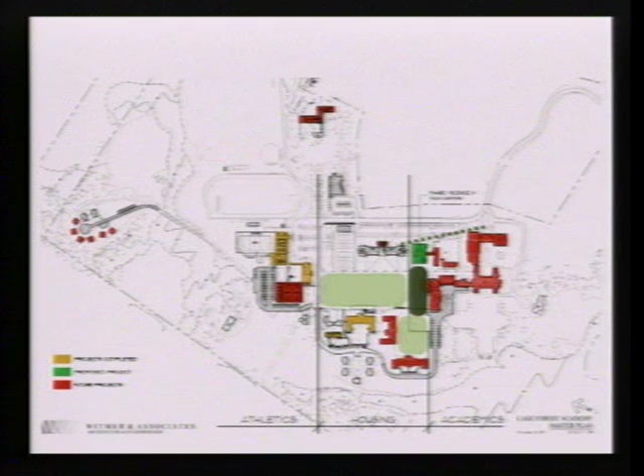And we really have four sides to this: the student union or cafeteria building here, our science building being here. So we have this active space, which is this field. And then we'd also like to set up this secondary park space, student area, which would be more passive, meaning a place to hang out, sit down under trees. So we want to start to create that space with our new building too.

In color codes, this is red, so these are existing buildings that will be future projects. Also, there's an existing dorm to the west here, and these are some new dorms proposed for long-term planning.

Circulation: these areas just show sort of main corridors of circulation. Actually, east-west is more pedestrian, this being the biggest one that comes into the front door of the old Reid Hall, and these are secondary pedestrian patterns that go through the campus. We wanted to maintain and really enhance that.

And north-south is core, the main one being down through the center of the campus, which is mainly pedestrian access, also vehicular, and then vehicular access as you come around the secondary one on the other side of the green.

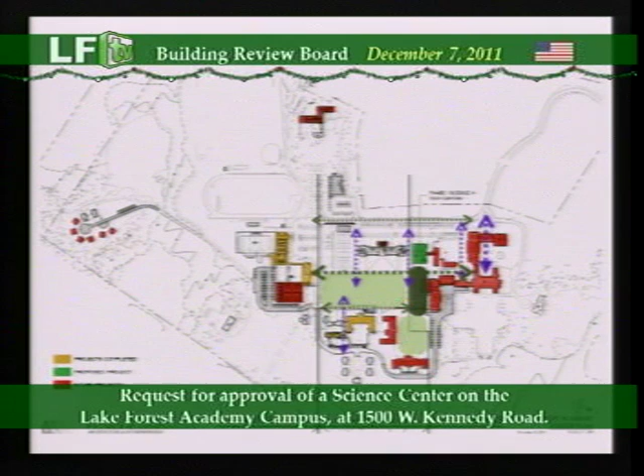So that really, as the site unfolds, this is just a little close-up of that. This is the existing Performing Arts Center. Here's our new building, and we really wanted to think about all the space around the building.

These yellow arrows really are the student access to our building. So two outside ones, which are this one to the west, along underneath the loggia on the existing building coming through this space, and then the one on the east, and then an interior link that would link into the Performing Arts Center.

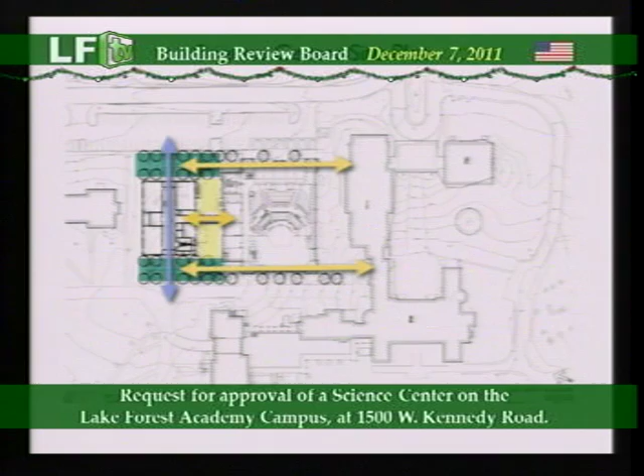Secondary access being very important, that there's a way through the building, both visually and physically, to get from the parking lot into the campus this way, that you can see through the building, through the center spine. Our landscape plan then sort of follows that idea and enhances that we have these park spaces.

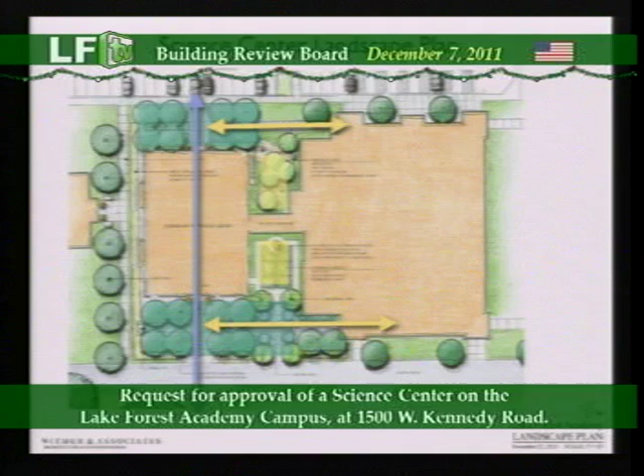Let me just show the arrows here. These are the circulation patterns through the landscape plan. And then we have these park spaces for sitting and student activity, really lounging outside space in the front of the building, and then more importantly in the south or west of the building, which is really on this main axis through the campus.

And then we've created these exterior courtyard spaces really for scientific experiments that they have within the school, that they can develop in these courtyard spaces between the two buildings.

There's also an alley along the north side of the building which allows students and faculty to transpose into the buffer there. They've got sort of an alley of trees that go along this, and these pick up the secondary alley that starts to run down the side of the green.

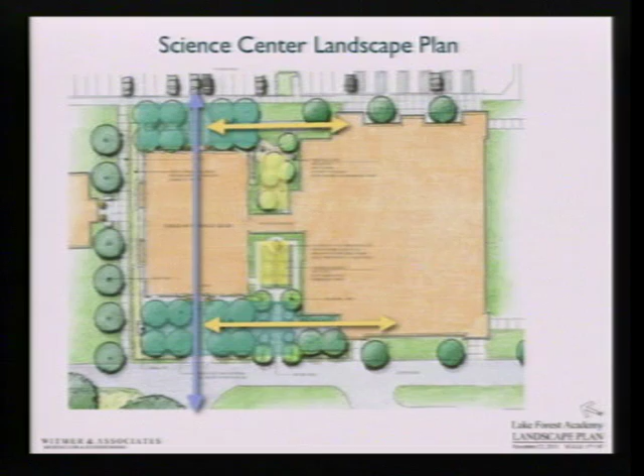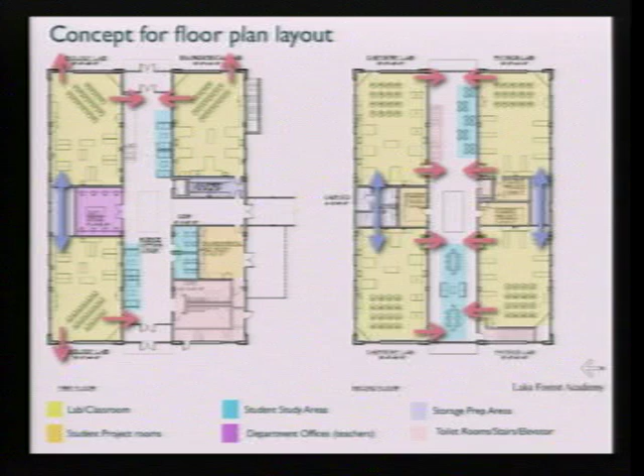The building itself is pretty simple, and what we try to do is do things somewhat in a scientific manner. We needed 8 labs, or 7 labs, and really we have one corner here which is toilets and some support space, and then it's got lab rooms in every corner, and they're such a large size, about a third bigger than what the existing spaces are now, that they need 2 ways out, so that sets up some circulation.

And so we have this center corridor space that really is open in pure glass on either side. It's not only a way to transpose and get into the classrooms, but it has learning spaces and spaces that kids can study out into, some lounge areas in the center of the building.

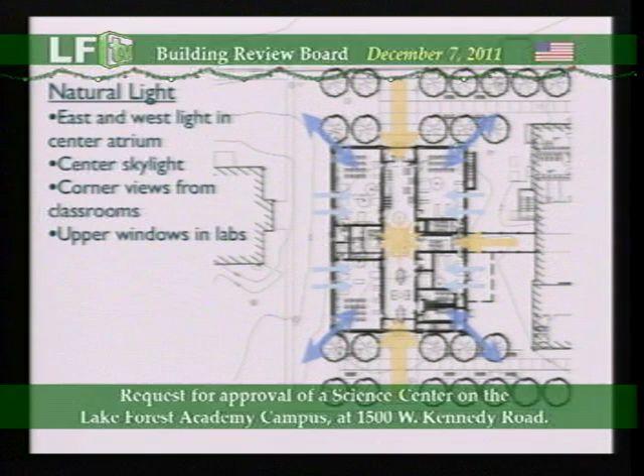Natural light's really important. We have 3 different ways of getting light into the building. One is the biggest way, the glass in the center atrium, which has glass on either end, plus a big skylight in the center, and light that comes in from the link. Then the classrooms have large windows in the corners, which are part of the learning spaces in terms of the lecture area.

We need some flat wall for projections and for board space. In the back of the rooms, there are smaller windows above the lab counters, which allow natural light to get into the back of the building, or the back of the classrooms. So there are 2 different ways that it gets in.

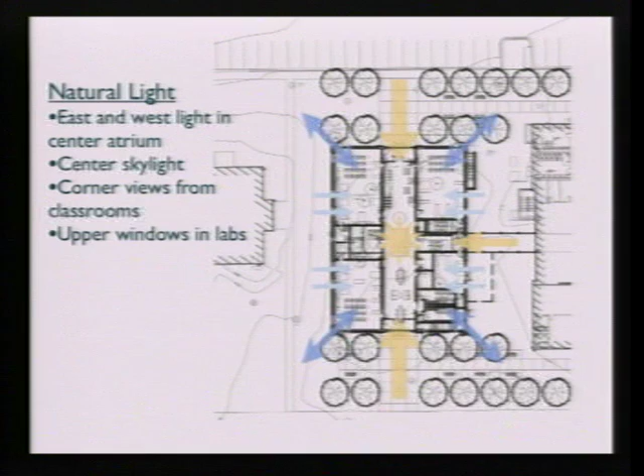The structural system is somewhat interesting because we looked at a number of different ways of doing it. What we're proposing is a precast insulated panel on the exterior, which will be a bearing wall, and then a poured concrete column and slab system that comes in. So we're going to stand up the walls, all 2 stories of them, and then come back in and pour the floors.

It's important that the interior, the structure itself, will be the visual on the inside, so you'll see not only the concrete columns, but the drop panels where it picks up the shear of the load of the column coming through. When you teach kids through these things, you can see the structural piece of it, which we feel is important. The insulated exterior panels are interesting in terms of how they're made, the insulation value, and the finishes on the inside and outside. There's a lot of interesting aspects that we feel are appropriate for a science building.

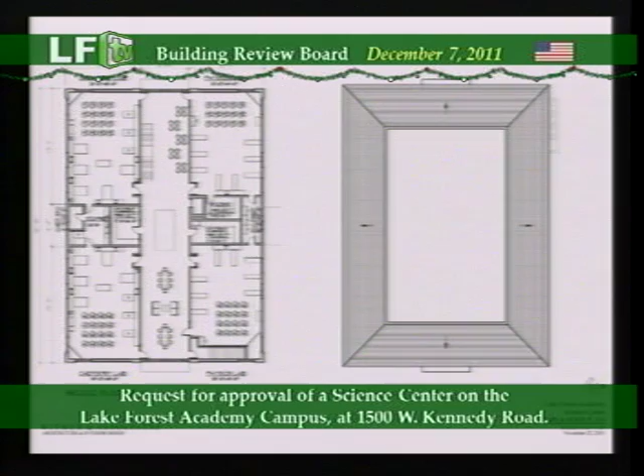Here's just the clean floor plans. The roof plan is a big bathtub, hides our equipment. I didn't show the skylight in the center, the big skylight in the center there.

Our visuals of what we really looked at in terms of science buildings, I think the Apple Store is a good one. I think it's an iconic thing, and I think this idea of sort of clear glass middle stems from that. Just some other schools that have done science buildings in the past that we were looking at, a lot of natural light. And then the existing context that we're putting this building in.

The existing manor house that's there, we've studied it for a long time. It's funny, I've looked at it for probably, I want to say like 18 or 20 years ago. I was with another firm, and we were looking at doing a building, the first spot right here, a library, and we actually looked at it being a modern building. So there's a lot of qualities they looked at, and then over the years, just understanding the features of that building, how it's put together.

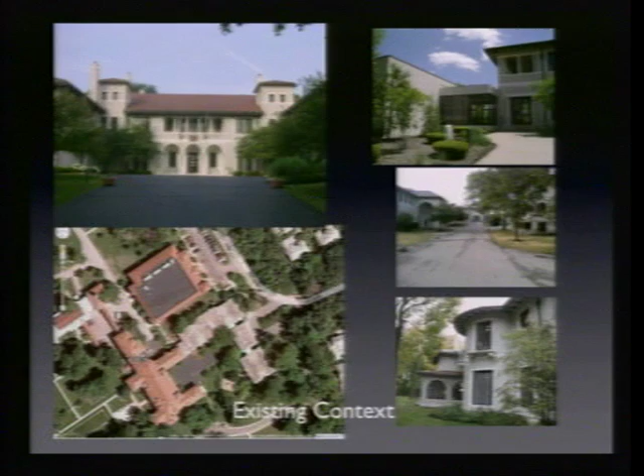Basically what it boils down to is it's a roof of tile, and then 2 materials that have trim and wall. So we've responded in different ways, and we want to think about that building in a similar way. The other is the existing Walter Netsch building, the concrete, and how when he designed that building, how he responded to the existing structure in its ideas. I think when we went through the structural framing of this, how these things are put together, it had some influence on how we did this new building and thinking about it.

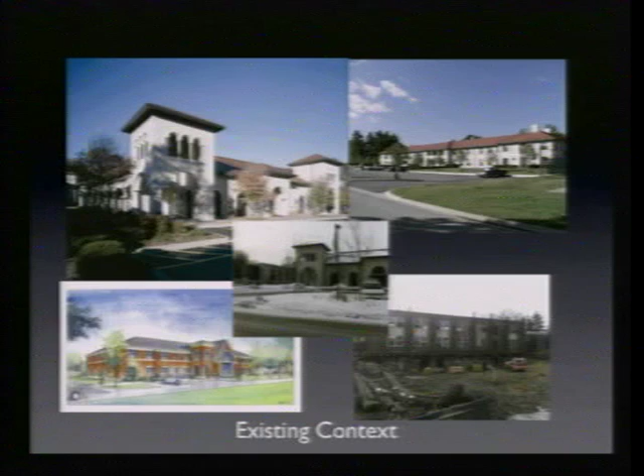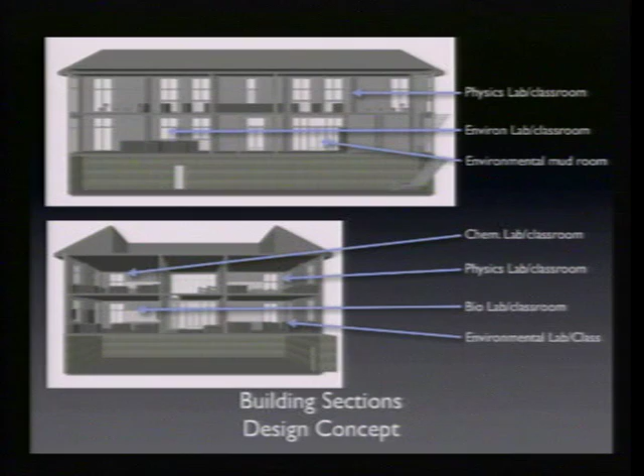And I would say lastly is all the projects that we've done in the past, over the years, the Performing Arts Center, the dormitory, the building that we moved, and all the little details that we've come up with for all those different pieces. These are just some sections which show kind of how the windows work at the corners. These are floor-to-ceiling windows, and the windows in the lab space, this bathtub piece, this center atrium area, it's all glass.

Some design concepts that are important to us. One is these exterior gathering spaces that we talked about. We also feel it's very important that the building height really relate to the Performing Arts Center, so that when you come in across here in the front and the back, these eaves line up. And we're fortunate that our floor-to-floor heights really work with a science lab, because if it's too short, it doesn't really work. So we feel like that's important to have that continuity.

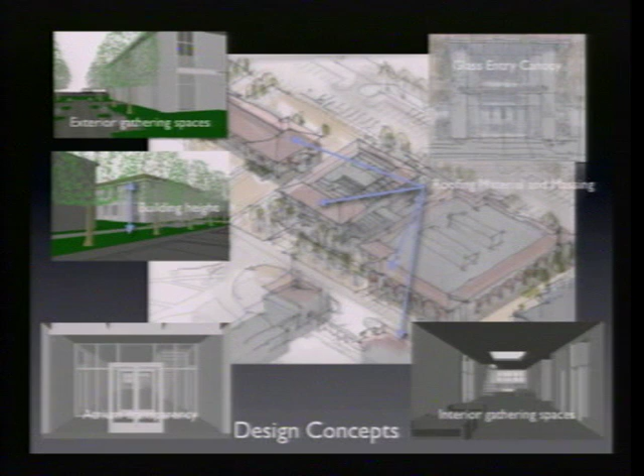The roof shapes, I think it's really important that we use Ludowici clay tile, which is on the original building, and that we used on all the other buildings, that's a continuum along this edge, so that this building really fits in.

Transparency through the center of the building. We're going to design this with LEED in mind, so we're going to submit it for a LEED certified building. We'll use a bunch of techniques which make sense, not only for any building that we do, but especially for a science building and the teaching opportunities that we have with those ideas.

These are some renderings which show the exterior. This center glazed area is going to be smoother. It's going to be butt glazed panels that come together without any mullions or caps on the outside. The corner windows will have aluminum mullion caps, so that you really read this as smooth glass. There's a glass canopy that sticks out about 6 feet, which will have glass panels above the top, and you'll really be able to look through that space.

Here too, you can see the pilasters at the corners and the two colors, the light color and the dark color, which relate back to the original structure and actually all the buildings that we've done over time at the academy. This is just a corner looking at the northeast.

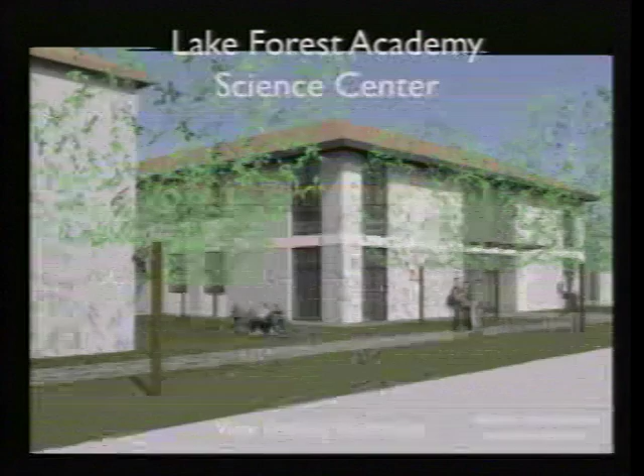This is the existing performing arts building, these roofs lining up with the clay tile roofs, you can see the canopy entry here. I'm sorry, I had that flipped, I was looking at the west and the east. They're almost identical with the exception of one door location.

The other thing that's really important is that from the parking lot or from the green in the back, you can see into this building. You can see the science pieces of it, the classrooms, you can see what's happening, that it is a science building just from the function of the inside, through the transparency of it.

This is from the courtyard, or the green in the center, so you'll see the classroom space, the lab hoods, and all the things in the back piece here. This is that green park space. These are just sort of diagrammatic in terms of trees and showing scale.

To the space, I think the landscape plan has a little better detail on the particulars. There's more ground cover and more lower plantings along the building. It's kind of a combination of all those.

I'm almost done. I have a sample here of the precast, and then I took these slides.

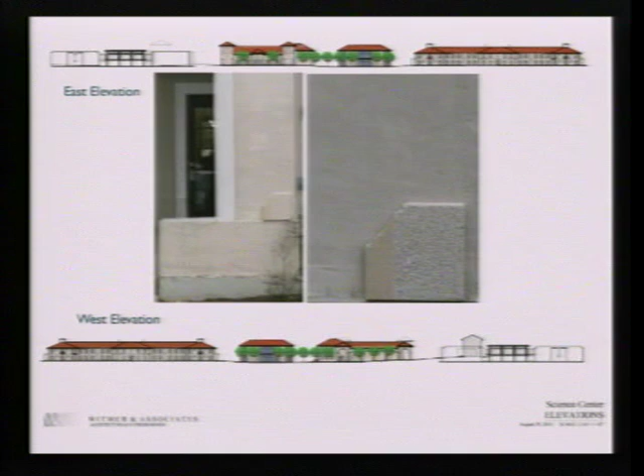Basically what I wanted to do was, this is the original theater building, and that's a little square here. What I want is, from the parking lot, that this looks like the same, like you can't tell, it looks like stucco. But when you get up close, you can actually see what the composite is, the aggregate, the cement, how that's put together. So it's different than stucco. Again, just like a scientific idea, you can see what the materials are made up of to make that concrete piece.

And I have a sample. They've done a pretty good job. This is the first one that we've taken out. I'm really happy with this piece. This is the trim piece. What you can see here is this piece.

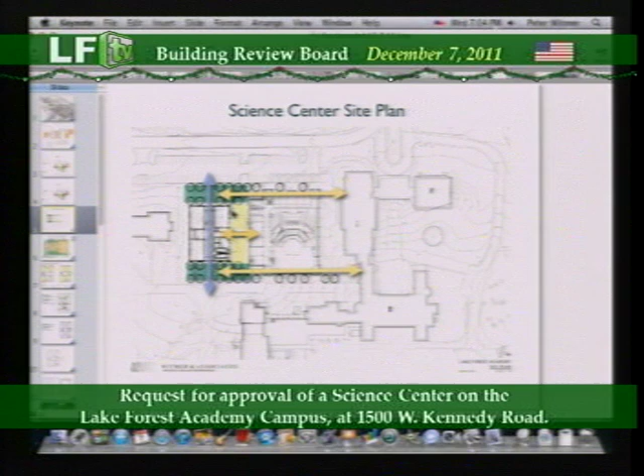So the roof over that connecting link, that's the same height and width as the banding that goes across the front of the building? Right. And that'll be concrete? That'd be a concrete roof, right? Mm-hmm, that'd be poured concrete.

Okay, I wasn't clear between the renderings and the elevations on the windows. Is it the intent for the corner windows to go to the floor? Yes. And then the ones in the interior, there's a concrete panel? It's designed to look like an insert panel, but it's actually part of the precast. It's the trim color.

That concrete panel is at the millwork where the countertops are for the labs in the back. In the lower windows that go to the floor, we have an operable piece at the bottom, an awning, so you get natural ventilation through those spaces. The idea is to get as much glass into the classrooms so you can see out as much as possible.

In the floor plans, it looks like you have those flat panels or whiteboards in each of the corners. Are those in front of those windows, or how does that work? I think the best way would be to look at the corner.

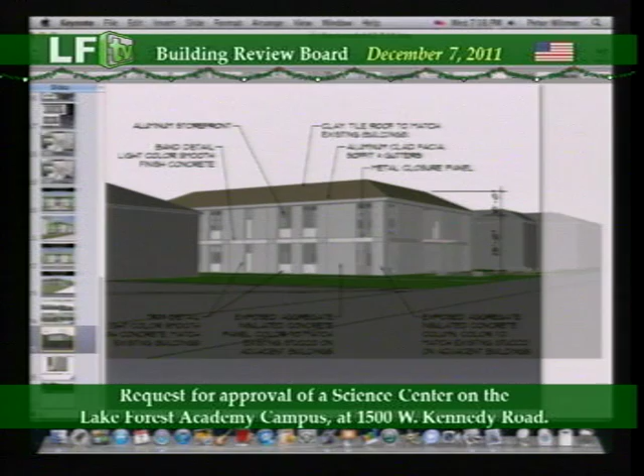One of the things when I was looking at the building next door, Atlas Hall, where you've got that banding and arrangement of windows, it becomes a very horizontal type of structure across the facade. Looking at the front of this building with windows going floor to ceiling, it starts to become more of a vertical element. Is that the intent, or is that what you're thinking?

Okay, a question on the precast panels with exposed aggregate. How coarse or how much texture does that actually have? This is it.

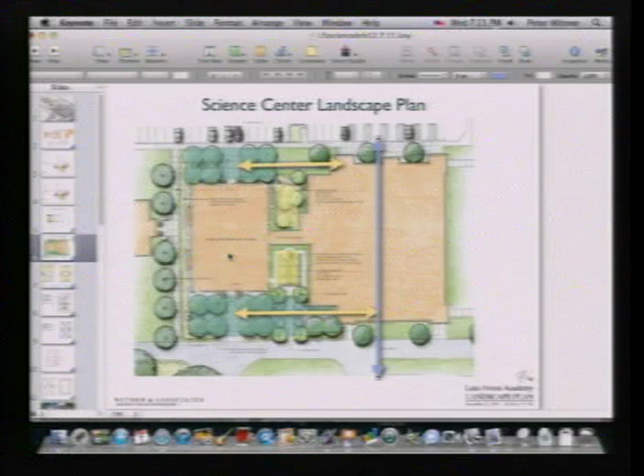Well, I think the question of pervious versus impervious would come down to your engineering. I'm assuming currently that front parking lot is used somewhat for detention? No, not at all.

No, it's all in the pond. Actually you can't see it, it's back about a half a mile away. The pond that's behind, in the fields, back in the corner—no, not the one you come in on, it's actually on the other side, behind the soccer fields and all that, in the corner there.

Is that the intention, to somehow get water there? Because I know the site's flat. Yeah, it's all pipe—all these drains go out to that. Okay, and the engineering's been done?

And that was done by the city a while ago, yeah.

A question for Kathy: is the location of the building any purview of this board, or does it go to Planning Commission and CBA as a special use process? The overall campus master plan identified an academic area, residential area, and athletic area, so the plan anticipated further growth on the campus, and this is consistent with that plan.

So there is no further action required by any other board at this point. Then I guess my question is, Peter, this seems like the first choice for a location. It seems like you looked at three others, and I wondered why it was viable to consider others, since this does seem the perfect place.

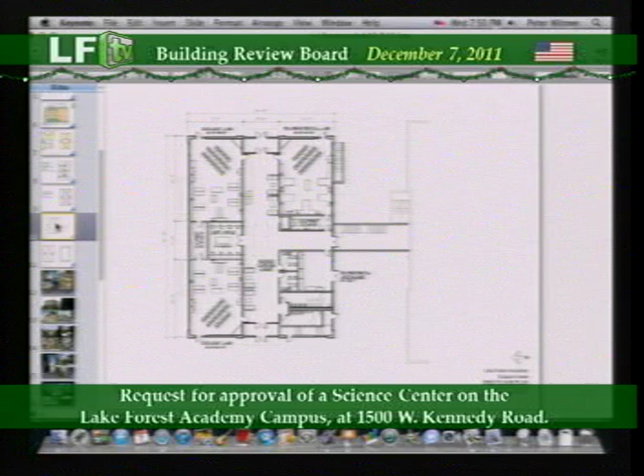Here we have a grove of trees right in front of the building. I think we have some ground cover, but there aren't really any small bushes along that edge. To me, it doesn't make a lot of sense. Well, you do have it at the dormitory to the north, and I think there is also some foundation plantings at the north end of Cressey, but I was wondering what your thoughts were on it.

I really want the tree species we pick out there to make sense. Ginkgo trees made sense to me because it's kind of a prehistoric tree. It gives off an oil. All the leaves drop in a couple hours. It does a lot of scientific stuff. It seems to me that we want to put plants around this building that are scientific, that make sense.

I'm not sure if foundation plantings make sense from a scientific standpoint. So I don't know that we'll really need it.

The ornamental gardens in this building are from the historic ornamental gardens, so you go back, you have these ornamental gardens, cutting beds, all those sorts of things. In front of the school, when you pull in, that center island ought to be the same sort of detail work. The academy only has a certain extra amount of maintenance to keep it maintained.

We're trying to see long-term, is it going to make sense? We're trying to look at it campus-wide to get a plan that really works for long-term maintenance. I'd like to look at the idea of ornamental grasses being our foundation planting.